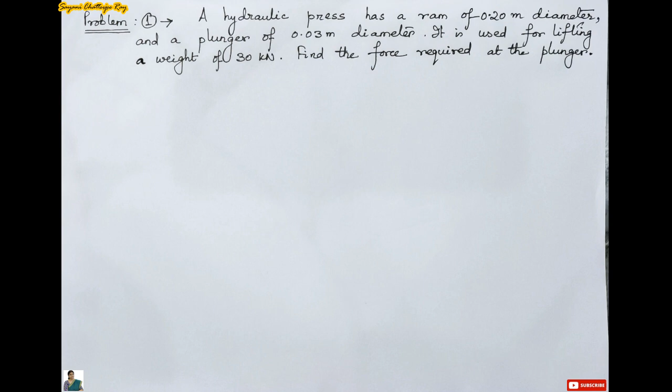Today we will be solving the first problem of our topic, hydrostatic pressure. First, let us see what is given in the question. A hydraulic press has a ram of 0.2 meter diameter and a plunger of 0.03 meter diameter. It is used for lifting a weight of 30 kN. Find the force required at the plunger.

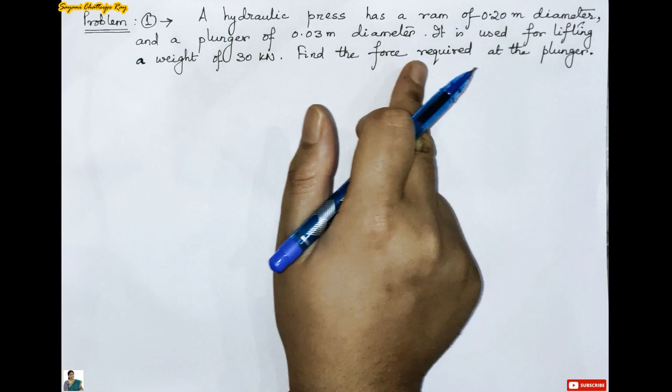First of all, we will see what is a hydraulic press. A hydraulic press is actually a device which is used for lifting heavy weights by the application of much smaller forces. It is based on Pascal's law.

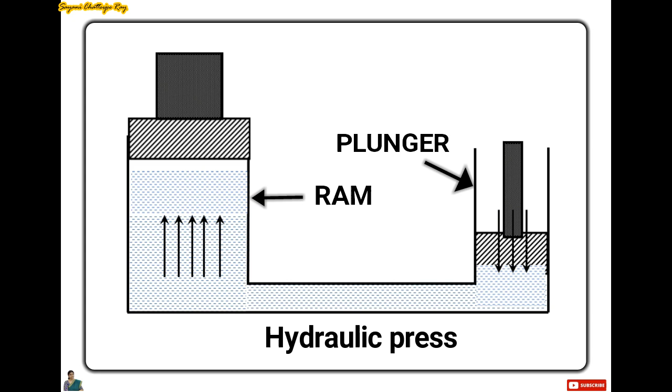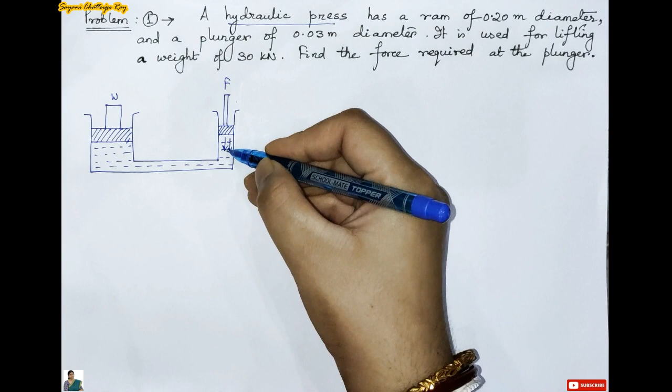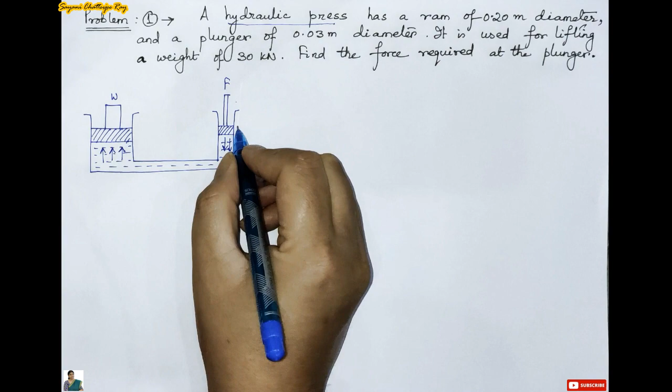I have drawn this diagram of hydraulic press. When we apply a load on this plunger, it moves down and the same amount of fluid will be displaced in this part of the container, and the same pressure is created on this connecting pipe and the other cylinder also, and as a result the water displaces up on the connecting cylinder. So this part of the hydraulic press is called as plunger and this part is called as ram.

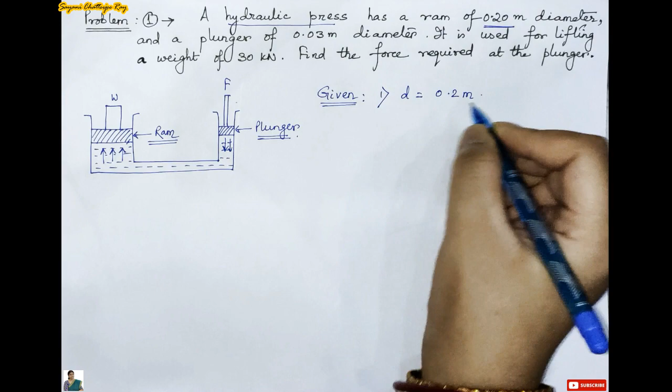So now we will write the given data. First is the diameter of the ram, that is 0.2 meter. Next is the diameter of the plunger of the hydraulic press, which is 0.03 meter. For easy understanding, I am rewriting the diameter of the ram as dr and diameter of plunger as dp.

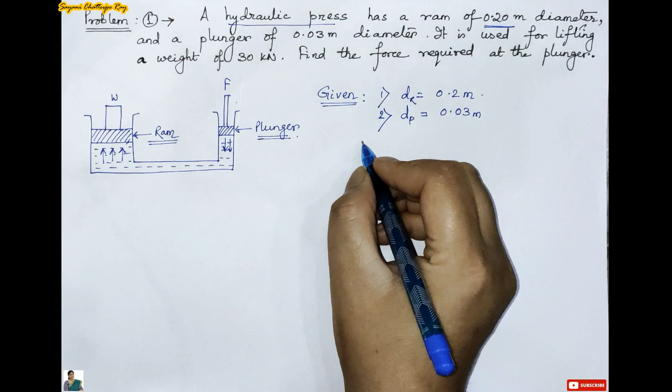Therefore, now we will find the area of the ram. So area of ram, A suffix r, equals pi by 4 into dr square. Dr equals 0.2, so pi by 4 into 0.2 square equals 0.0314 meter square.

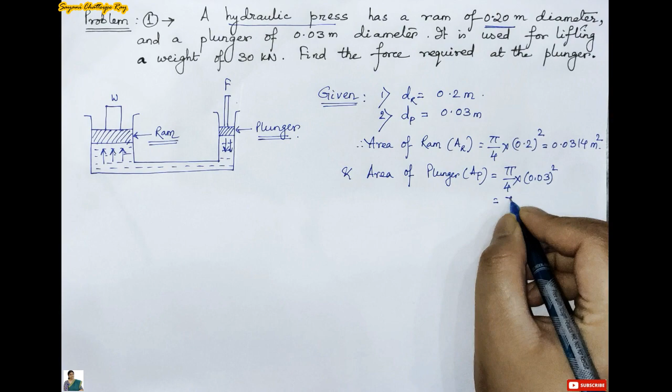Now we will find the area of the plunger. Area of plunger, A suffix p, equals pi by 4 multiplied by dp square. So pi by 4 into 0.03 the whole square comes out to be 7.068 into 10 raised to minus 4 meters squared. And the third given data in the question is the weight.

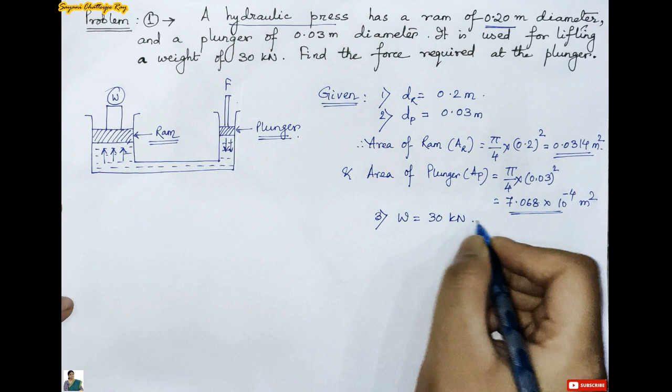The weight which is placed above the ram, that is W equals 30 kilonewton. Now we will convert 30 kilonewton into newtons. So it will be equal to 30 into 10 to the power 3 newton, that is equal to 30,000 newton.

Now we will do the solution part. The pressure intensity developed due to the plunger, and the plunger is placed in the smaller cylinder which you can see in the diagram, and pressure intensity equals force divided by area. Therefore, the force acting on the ram equals the pressure intensity multiplied by area of the ram. We all know that intensity of pressure equals F by A.

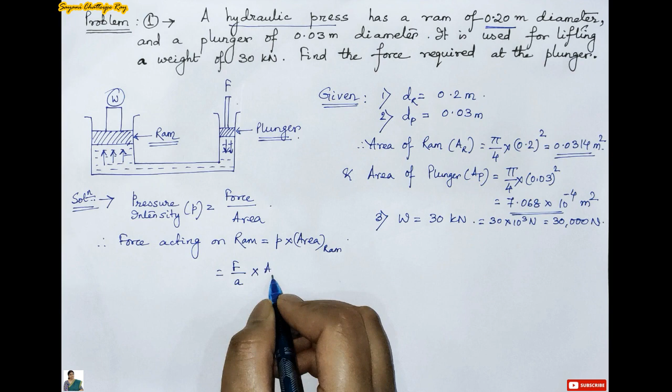So I am replacing P by F by A multiplied by the area of ram, and this will be equal to the force, F, multiplied by area of the ram. We have already found out the area of the ram, that is 0.0314 divided by A. Now this A is nothing but the area of the plunger, which is 7.068 multiplied by 10 to the power minus 4. So this AP is nothing but area of plunger.

And the unit of force is nothing but Newton. Now this force F is not known to us, so this is unknown. In this question we are asked to find out this force which is required at the plunger. The force acting on the ram, which is on the left side cylinder of the hydraulic press, is equal to the weight that is lifted, which equals 30,000 Newton. This weight lifted value was already given in the question.

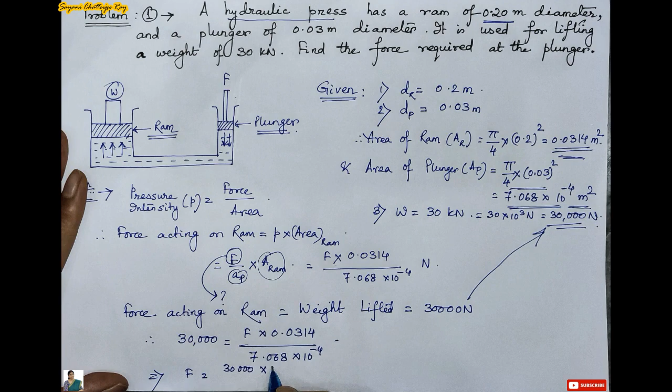Therefore 30,000 equals F into 0.0314 divided by 7.068 multiplied by 10 to the power minus 4. Now to find F, we will simply do cross multiplication. Therefore 30,000 multiplied by 7.068 multiplied by 10 to the power minus 4, divided by 0.0314.

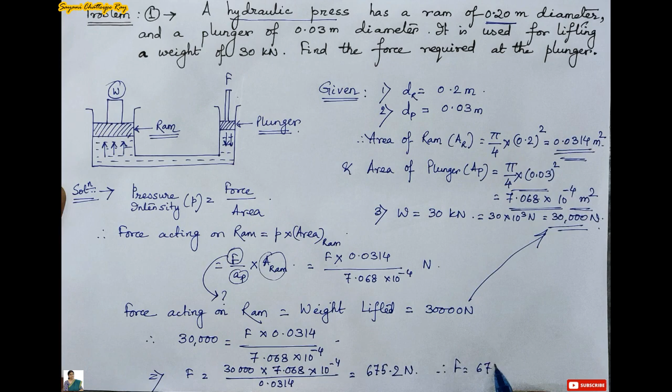Now it will be equal to 675.2 Newton. Therefore our answer, F, equals 675.2 Newton.

Now let us see the uses of hydraulic press in industry. Hydraulic press is used in the manufacture of car parts and several other parts of automobiles. Hydraulic press is also used in military applications, where loading shells and other ammunition-related tasks are involved. Hydraulic press is used in the manufacture of electrical equipments and electrical parts during any major electrical installations.